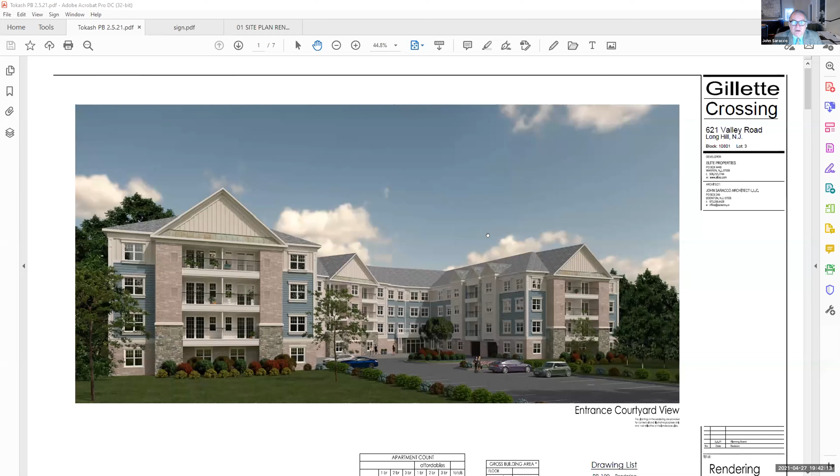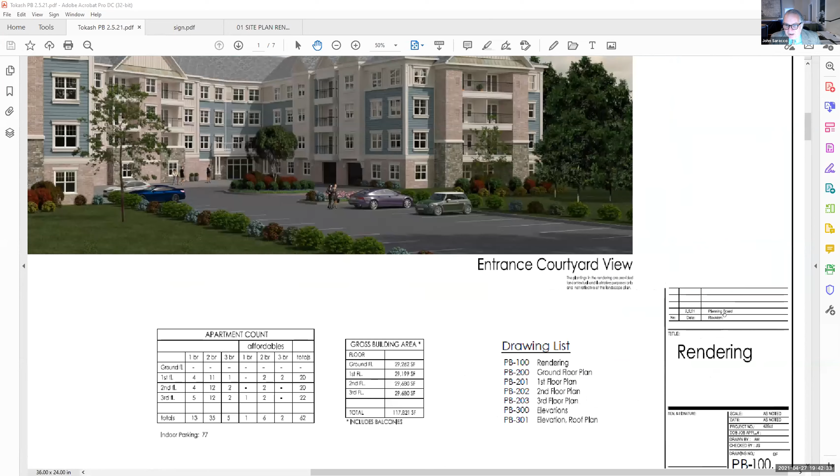Before you get going, John, Ms. Maziarz, I think this would be Exhibit A3. John, why don't you describe the date of this rendering so the board attorney can mark it? Sure. These are the drawings that were submitted on February 5th, 2021, and this particular drawing is PB 100. I'm sorry, Mr. Saracco, Mr. Orth, I believe it's already marked as Exhibit A2, Architectural Drawing 020521. Okay, very good. A3 is the Long Hill Settlement Agreement. Oh, very good. All right, so we'll refer to this back as A2 then for purposes of the record. Thank you, Mr. Bunch. Okay, John, go ahead.

Yeah, sure. So this is a view of the building as you would be driving down the entrance driveway off of Valley Road, and we're looking into the courtyard here, the center courtyard. Just if you don't mind, if I just refer back to the site plan, this is Dynamic's site plan that was presented last month, just to refresh everyone's understanding of the site. We're coming off of Valley Road here. We have some visitor parking off of Valley Road. Dynamic did a wonderful, nice curved driveway, soft curved driveway that leads us right into a very, very nicely landscaped courtyard, a turnaround. And the entrance to our building is right at the end of this courtyard. And the garage entrance is off this turnaround. And I'll show you more detail right on this side of the courtyard.

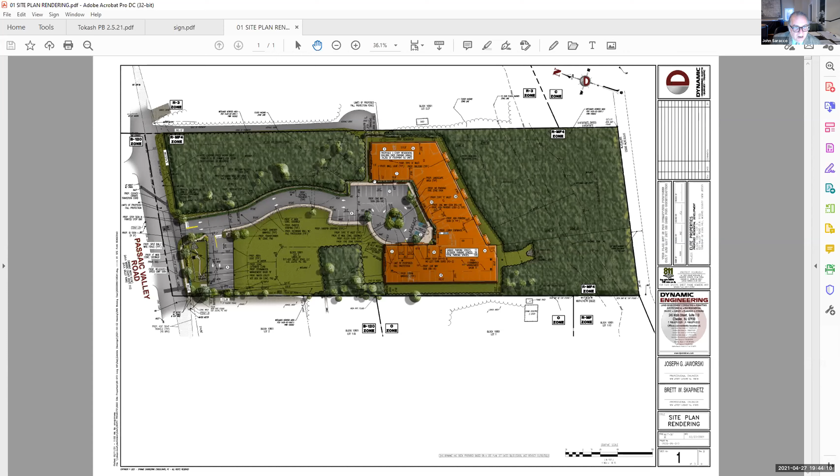So getting back to the rendering, this is the view at the curve of the driveway. We see the garage doors tucked underneath these bay windows here. This is the main entrance to the building at the far end of the courtyard. We framed this courtyard with two nice masonry stone and brick piers with some copper accent and a gable roof. And it's a very lively courtyard. We have nice balconies overlooking the courtyard, very nicely landscaped.

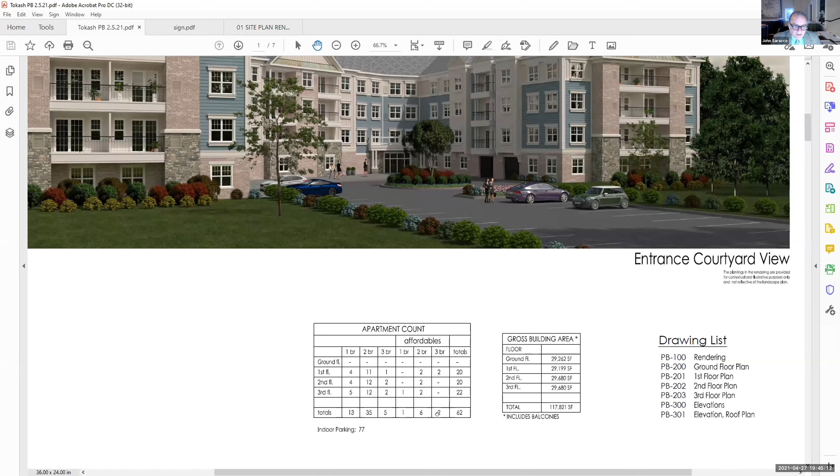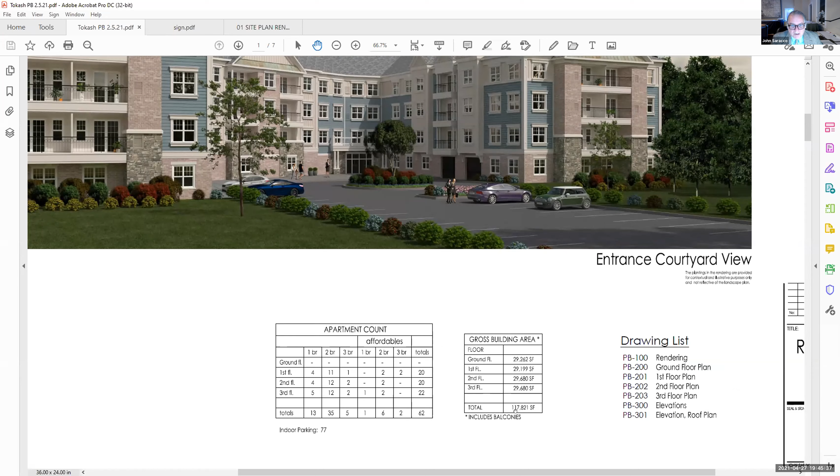Since I'm on this drawing, let me go through the unit counts. We have 53 market rate units: 13 one bedrooms, 35 two bedrooms, 5 three bedrooms. On the affordable end, we have 9 affordables: one bedroom, 6 two bedrooms, and 2 three bedrooms, meeting our affordable obligations. In the parking garage entrance here, we have 77 cars parked. To give you an idea of the size of the building, each floor is approximately 29,600 square feet, total building area of 117,800 square feet.

This is switching to PB, drawing PB 200. This is a plan of the ground floor, which is basically all indoor parking. We have our 2-story lobby at the far end of the courtyard, our trash room, bicycle parking, and our mechanical rooms.

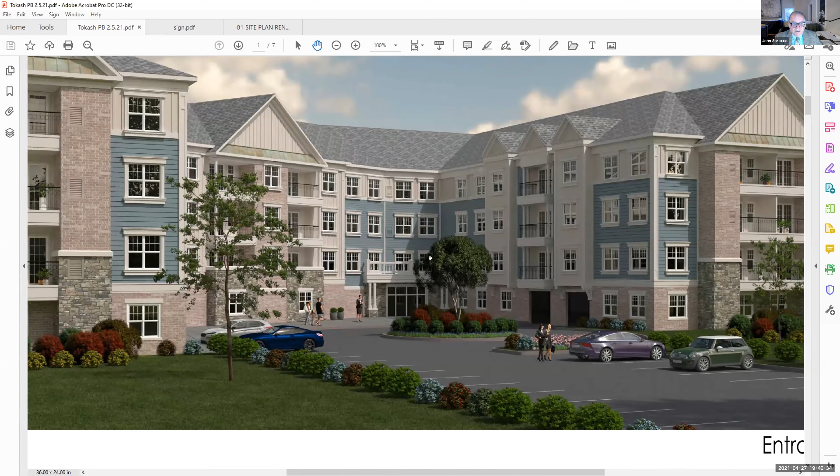Hold on a second - you said 2-story lobby. Is that 2 stories at the ground floor? It's a lobby, so these two windows are like clerestory windows. The lobby is 2 stories inside the building. And this is a portico that's basically covering the entrance, the exterior entrance to the lobby. The lobby is all 2-story interior.

There was some question about how the bicycles will get into the bicycle area. Over here we have a little side door. This circular courtyard is right here - I didn't show that on our plan, but this is the circular driveway. There's a little entrance door right off of that courtyard. Bicycles would come in this way and into the bicycle room.

Our trash room has trash chutes - I'll show you in a few minutes - from all the residential floors that people will shoot trash down to. Twice a week the trash will be handled; we'll have compactors in this room, and twice a week building maintenance will wheel the trash out the overhead doors to a waiting garbage truck, or they could wheel it out this door here. We also have 2 egress stairs to serve the egress requirements for the apartments upstairs.

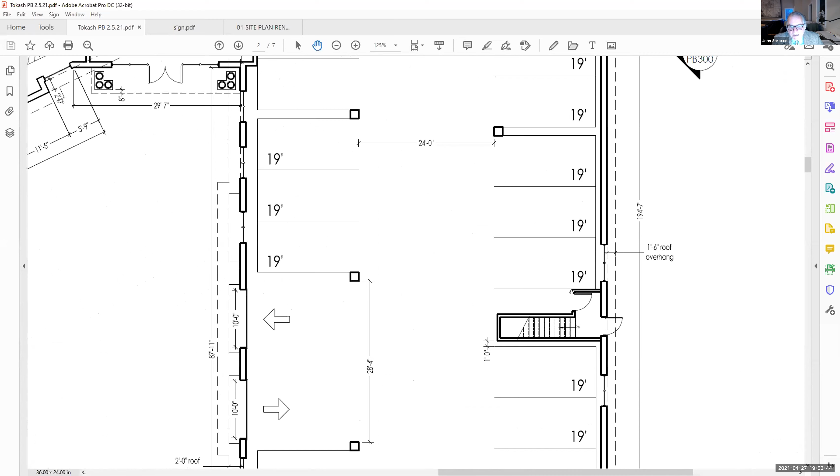I'm sorry Mr. Chair, did you say there were 3 exits or 4 exits? Three, I'm sorry. This exit here is the stairs from upstairs that exit to the side yard, but there's no door from the parking garage through here, so it's totally enclosed. Whereas this one, because I needed an exit at this end of the parking garage, we allowed for a door to exit through here at the ground floor.

And then of course we have the 2 overhead doors for the cars. We like 2 separate doors—they have a more residential feel. 10-foot doors are much more manageable, they don't break as often, and also every time you open a door you don't lose all the heat. This is a heated garage. In the winter, it's going to be fully sprinkled with an NFPA 13 sprinkler system.

If you would like, I can proceed upstairs. This is what I'm calling the first floor plan, but for argument's sake it's really the second floor. We like to just call the parking level the ground floor plan, but really it's a 1, 2, 3, 4-story building—we call it ground, 1, 2, 3. It just helps us differentiate the parking level from the residential floors.

So this is the first residential floor. When we look at the lobby, this is the area that's open to below—this 2-story lobby with the stair coming down into a lounge area. This would be an open railing, so it's just a very comfortable lounge area. And then off of this, the elevator opens up into a nice elevator lobby on the first floor.

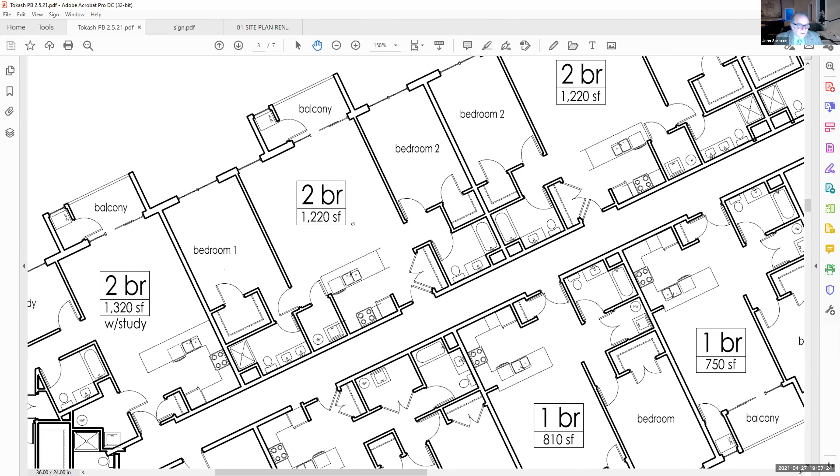We also have a line of 3-bedroom units, with 2 baths. We have a large corner master bedroom with a 4-fixture bathroom and a shower, a very modest third bedroom off of a hallway bathroom, and a larger second bedroom. All the units will have their own stackable washer dryer, and they will all have their own hot water heating, electric hot water heat.

We'll provide a gas kitchen. Each unit has what are called Magic Pack HVAC units. These are excellent units, vertical heating and air conditioning units that have a louver to the outside for fresh air and combustion exhaust, and they have a little door for service.

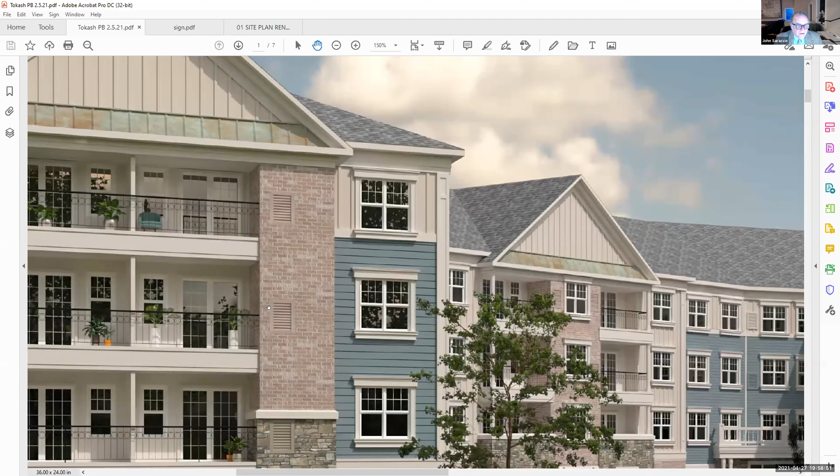Going back to the rendering a minute, you'll see these little louvers working with the HVAC unit immediately behind. We paint them the same color as whatever material they're against, so we think they become very quiet in the facade. You can see them here.

Going back to the typical floor, towards the end of the corridor here we have a trash room with two trash chutes, one for recyclables and one for general garbage, that goes down into that trash room on the ground floor.

In the little nooks and crannies, the dead areas in the knuckles of the building, we offer tenants additional tenant storage if they want.

Before you leave, can you go to the left-hand side of that drawing near the B? Yes, blow that up. This 2-bedroom unit? Yeah, that's fine. How do I get out on the balcony?

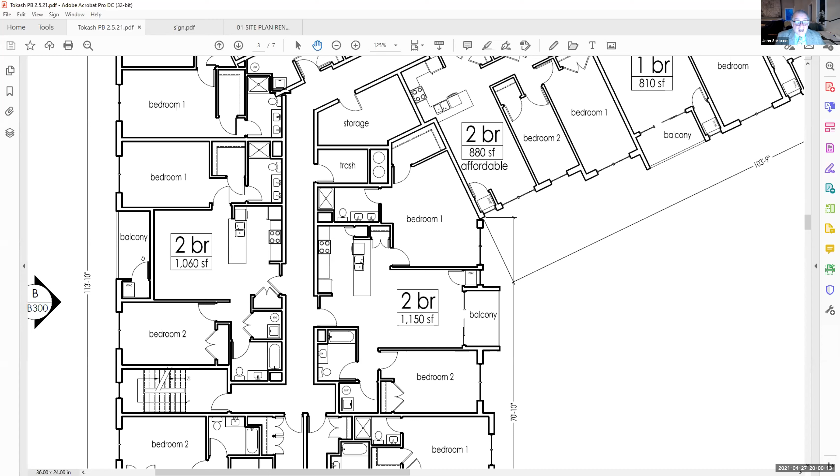So you're gonna have to pay extra for a patio door. You caught me red-handed. Good eyes, very good, thank you for that. Well, I'll speak to management about that.

I do note that the balconies on that side of the building are inset from the outside wall, whereas the other balconies extend beyond the outside wall. Is that a setback issue or a design alternative?

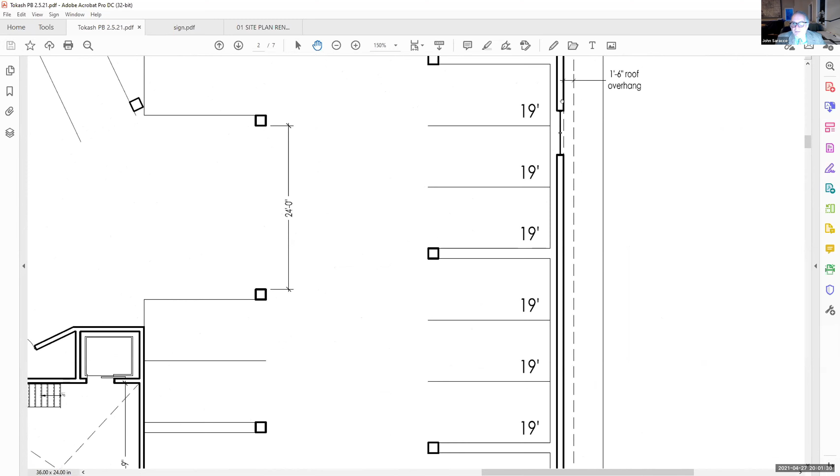Yeah, that's a very good point. One of the main reasons we had a resubmission on our drawings is because we had our side walls right on the required 20-foot side yard setback. One of the reviewers made a good comment that when you take into consideration the 18-inch roof overhang, the eave on the roof, we actually protruded into the side yard setback. So the major redesign in the resubmission was to push our two side walls, and this wall, in 18 inches so the roof overhang respects the 20-foot side yard.

So going back to your question, that's why these balconies don't go past the exterior wall, whereas the balconies in the back and along the courtyard have the luxury to extend past the line of the exterior wall, giving us a bigger living room.

So the 2-bedroom units on the east and west side are actually smaller by 160 square feet than the other 2-bedroom units because the balcony intrudes into the interior space?

Partially. There are funny geometries going on that are hard to picture. For instance, this 2-bedroom's size is really limited due to the location of the stair, and the stair location is basically dictated by the parking spaces down below. So there's a bunch of interrelationships that determine unit sizes. But I can pretty much assure you this unit will most likely rent out quicker than one of the units in the back—corner units are very desirable in the rental market.

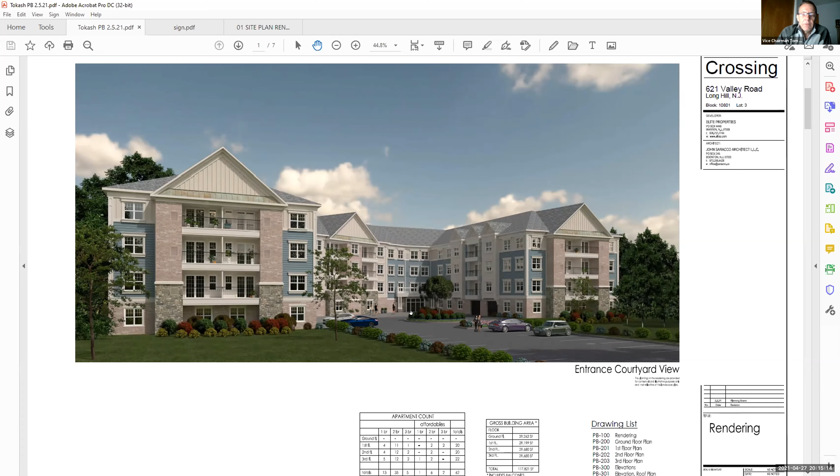You can say whatever you like, Mr. Orth, but that is a four-story building. Thank you. Are you going to talk to the height of the overall building, Mr. Saracco? Sure, give me one second.

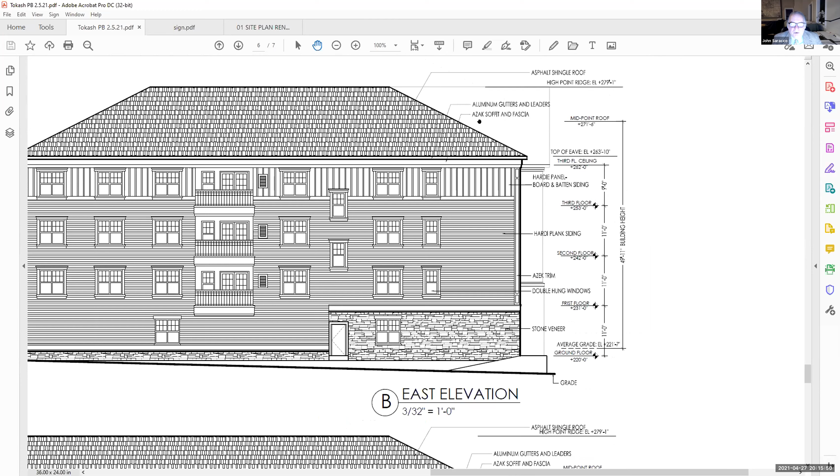So Dynamic established the average grade. I'm not sure if he spoke about that, but the civil engineer calculates the average grade for me, and he established it based on his grading plan at 221 feet 7 inches. We take our building height to the midpoint of the roof, which puts us right under the 50 foot limit — we're at 49 feet 11.

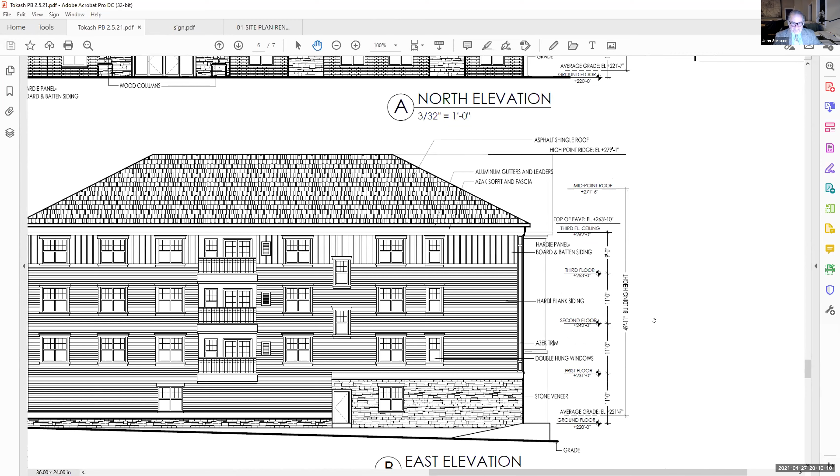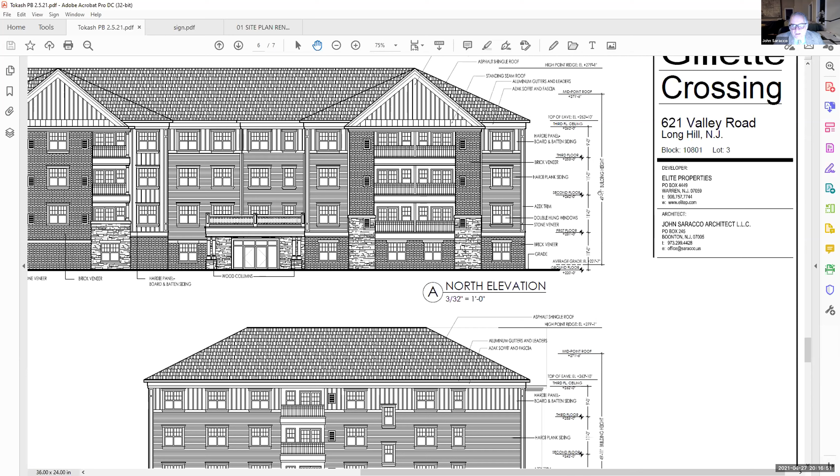And the high point of the roof is above the 50 point, but measuring to the midpoint, we're at 49.11. Okay, and this isn't against ordinance RMF 40, residential multifamily 40. Is that the ordinance for this property? I'm going to defer to Derek on that. It's the RMF 4 zone. That's correct. And you're aware that it is a 45-foot maximum building height? No, I'm a little bit at a loss here because I thought we were at the required building height of 50 feet. I don't have the civil zoning chart in front of me.

Mr. Orth? Just checking my notes, let me interject here. There's ordinance 460-20 that was adopted in July 2020, and that permitted a height up to 50 feet. Okay, thank you, what was that ordinance? It is ordinance number 460-20. Okay, thank you very much. Mr. Chair, those are all my questions.

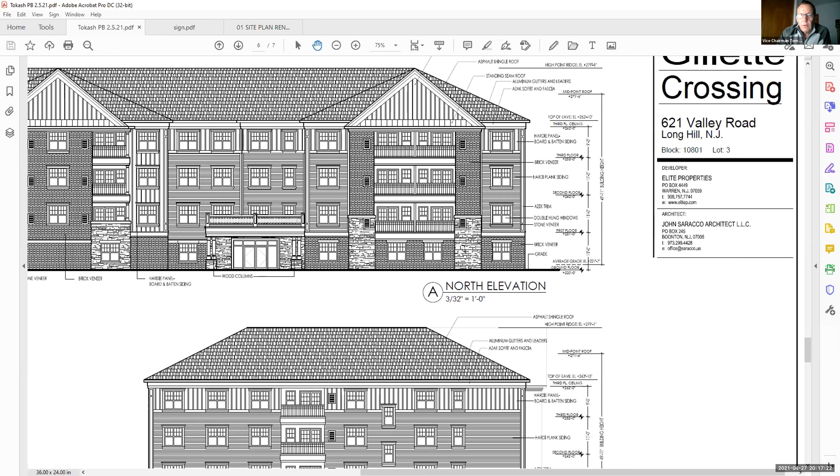Thank you. Okay, put your hand down. Mr. Malinowski, did you have your hand up during the questioning? No, I was just holding up a 5 to say the wall was going to be about 5 feet, that's all.

Okay, Rich, your turn. So my question relates back to a comment in our February 17th letter. I don't know if you had a chance to look at that letter. Yes, I did. And the question is relative to garbage pickup, and maybe you'll need your engineer as well to answer part of this, but it's really relating to the volume of garbage produced weekly, and how long the pickup will take relative to ingress and egress of residents in their parking stalls. I don't know if you can answer that.

Sure. First of all, this will be a private garbage contract, so the amount of pickups can be determined by management. If they feel the need for 3 pickups a week, they will certainly do so. Regarding what happens to people trying to get in and out, I should reiterate that this turnaround is 24 feet wide, so that will allow a garbage truck or even a moving van to park here, and cars can still pass and get around the truck. The garbage truck will probably stop here, and cars can get around with the 24-foot width. If that answers your question, I'm not sure.

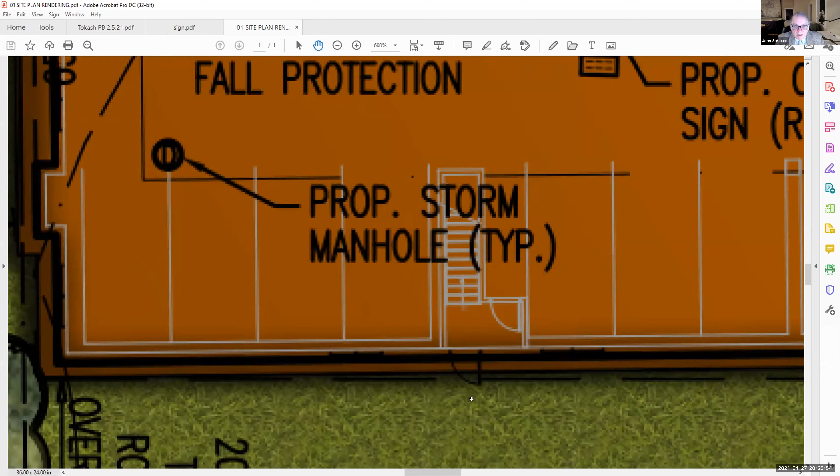The other question I had, somewhat related, is about the entrances or exits, egress, access points on the east and west facades. When you look at the site plan, the color rendering, it doesn't appear clear, for example when you leave the door, is that just grass outside? No, there should be a concrete pad here. And then when you walk further, you're running into landscaping, so there's no clear path from this exit or access point to the main area.

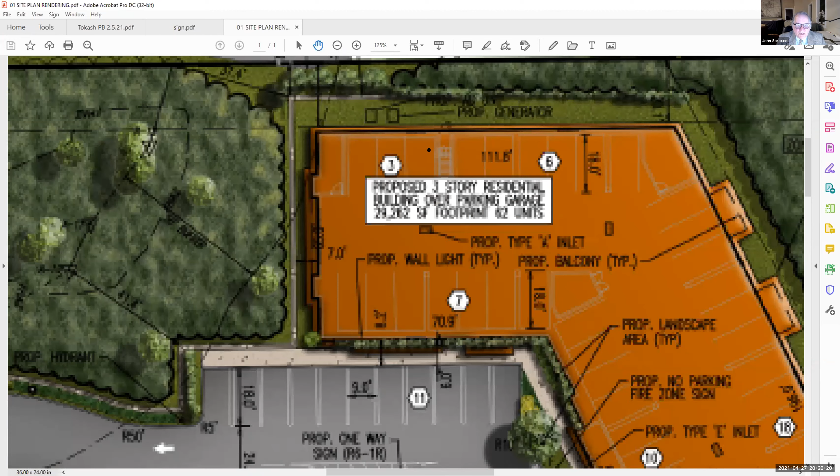Correct, so that's something we will address with Dynamic. I think it's a very manageable situation, but I'll leave it up to him to address it. He does recognize the doors, but he should be showing a pad here and making sure there's a clear walkway, for instance with the generator and things like that. That was my second question, that the generator and the AC unit are in the pathway of the egress.

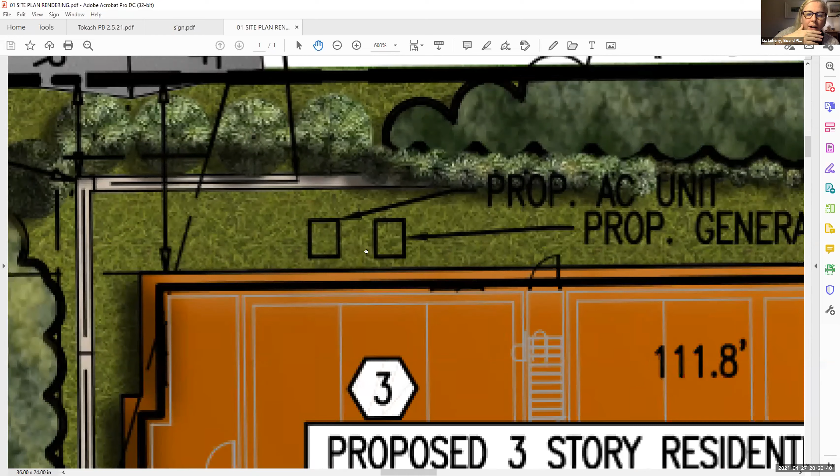The other thing, perhaps a question for Dynamic, is how are the generator and the HVAC going to be screened? Sure, first I should point out that they could be landscaped, but we have to coordinate the egress from this interior stair, a path to get to the emergency vehicles. So that has to work, but we do have room and typically landscape around these. If you don't mind, I should point out what these AC units are for.

Each apartment has their own HVAC unit, their own meters, they pay their own, and have complete control over heating and cooling — one unit can have air conditioning on while another has heat. This outdoor AC unit is for the common areas. And this generator is a voluntary generator, not code required. Elite likes to put in a 20 kilowatt generator basically to provide hallway lighting.

We like to put outlets in the hallway so that if a tenant, if we, God forbid, have a terrible storm and power's out for a week or two, tenants can at least make their way through the building. They won't be able to use the elevator, but they'll be able to see their way through, and the outlets in the corridor will give them charging stations for their phones.

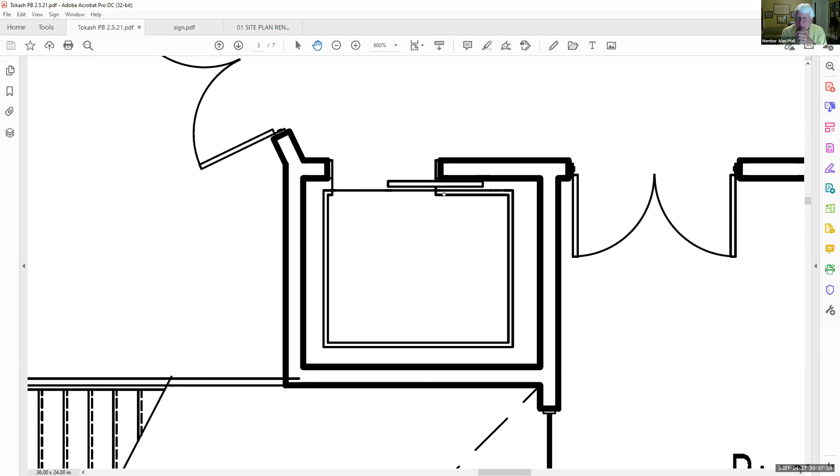It looks a little tight, but okay, so what we do is we will specify a 9-foot high cab, meaning the ceiling height is 9.5, so they could stand a lot of furniture up. I would also point out that 3,500 pounds is actually a pretty big elevator. Typically before the ADA, before the stretcher requirements kicked in, a building like this we would see a 2,500-pound elevator. So these are comfortable elevators.

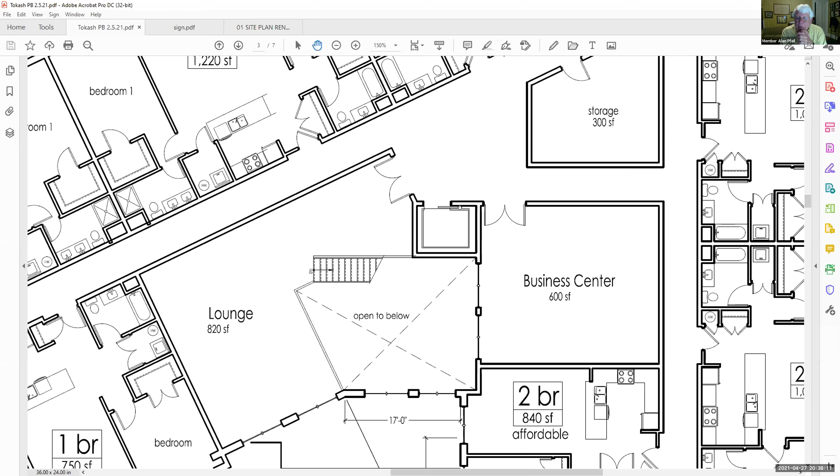Any other board members with questions? In that case, Mr. Prelgiver, are you still with us? Do you have any questions for the architect? Yes, I do. Unless I'm missing something, Mr. Saracco, there's no exit from the rear of the building, is there? No.

So just looking at a typical floor, as I mentioned before, we have this corridor wrapping around, with stairs at the end of each corridor. The building code requires a maximum travel distance, meaning when you take this unit in the middle, there's a maximum distance they're allowed to travel by code, and we meet those requirements. So we had no reason to add another stair in the back. If we took this stair and put it in the back, this would be what we call a dead end corridor, which isn't permitted, meaning...

I'm sorry, I either froze up or you froze up. I didn't hear the latter part of your answer. So if we took this stair here and put it over here, this would be considered a dead end corridor, which isn't permitted by code, meaning if there's a fire right here, this unit would have to walk past the fire to get outside. So we meet the code by providing the 2 stairs at the furthest ends of the corridor.

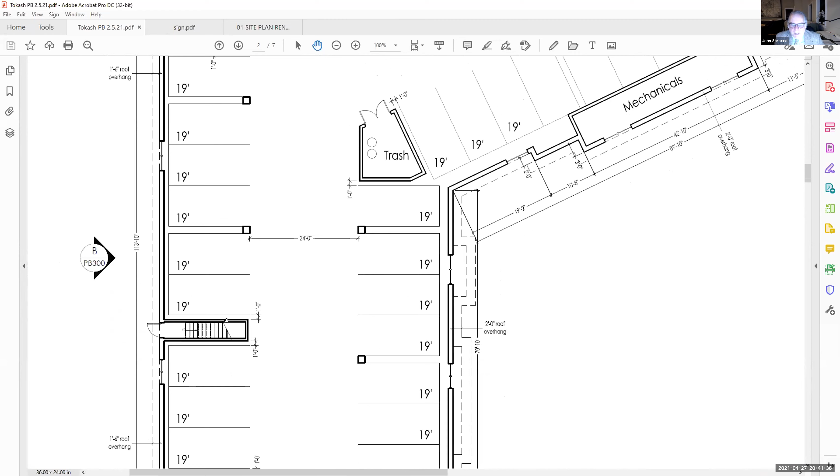Right. So I think maybe the drawings aren't clear, but this stair coming from the upper floors is enclosed in a 2-hour fire rated partition. So this stair is not open to the garage at all. So if there is a fire in the parking garage, this wall will be stable for at least 2 hours. The sprinkler system basically is a method to allow people to safely get out of the building. So between the 2-hour duration of this wall and the fact that the building is fully sprinkled, people will be able to safely get out of this building.

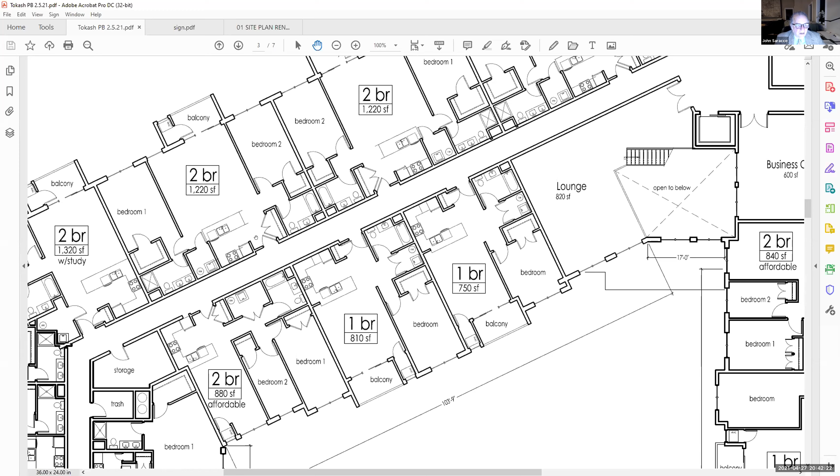Well, are you going to have fire escapes in the back of the building? So this corridor, this is a fire rated corridor. All the apartment doors are all self-closing, meaning you can't leave the door open unless you put a chair in front of it. These are all fire rated doors. So this entire corridor is a rated corridor that allows people to safely either go one way or they could go the other way, depending on where the fire is.

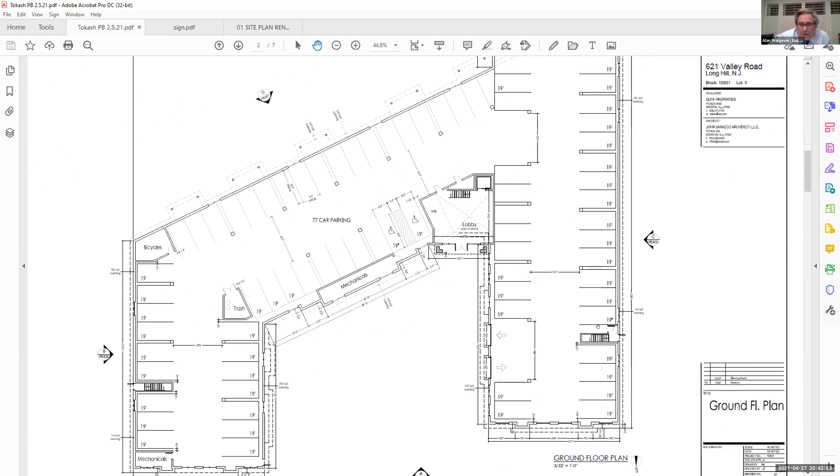Once they enter this 2-hour rated fire stair, then they are within a 2-hour fire enclosure until they get to the side yard, unless the fire is in one of the apartments and the door is opened and the fire spreads to the hallway, which is also equally plausible, is it not?

It's possible, but you have to realize— Objection. John, this is another hypothetical after hypothetical after hypothetical. No, it's really not. It's life. And if I were living in this building, these are very rational questions to ask. They're fire safety issues, and I'm asking them.

And I think it's thoroughly warranted. Are there going to be fire escapes in the back of this building, or some means of egress other than these halls? I think that's a yes or no answer. No. No. And why not? Why wouldn't you have a fire escape?

I'd like to stop you there because you're once again trespassing on hypotheticals. He gave you an answer to the question, and that is no. He has testified that it meets all the fire safety codes. I think this is a line of questioning that isn't going to go very far. Well, I think it's a very legitimate line of questioning, respectfully, Mr. Chairman. And I think cutting it off is a mistake.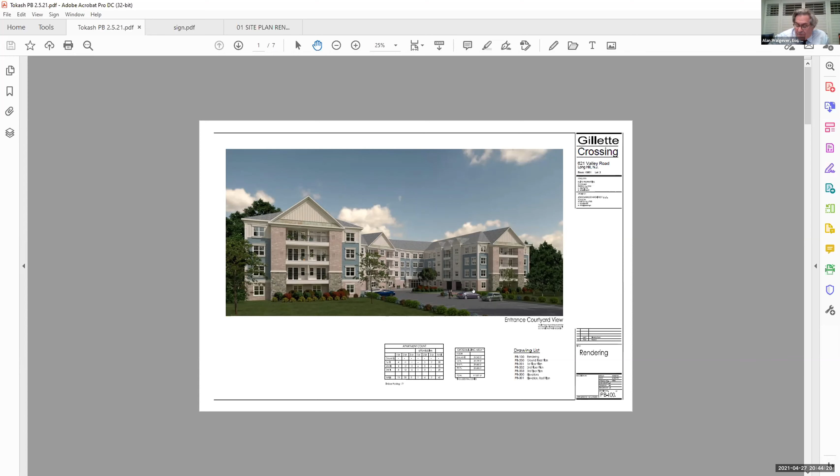I think that is a comment rather than a question on the testimony, and comments are reserved for the end of the hearing. Well, it's not a comment, it's a question. You have to let me—look, you have to be fair enough to let me finish my questions. And you're stopping me, and that's really not fair.

I would like you to ask questions about the testimony that the architect has given. I've got to ask questions even in the absence of what his testimony dealt with, because I think they're critical. Let me ask you this: what portion of this building is sprinkled, and where is it sprinkled and where is it not?

All the apartments are sprinkled. The corridor is sprinkled.

The parking garage is sprinkled. All the spaces are sprinkled. And what is the roof, if you will, of the parking garage made of? Is it made of fire safety material?

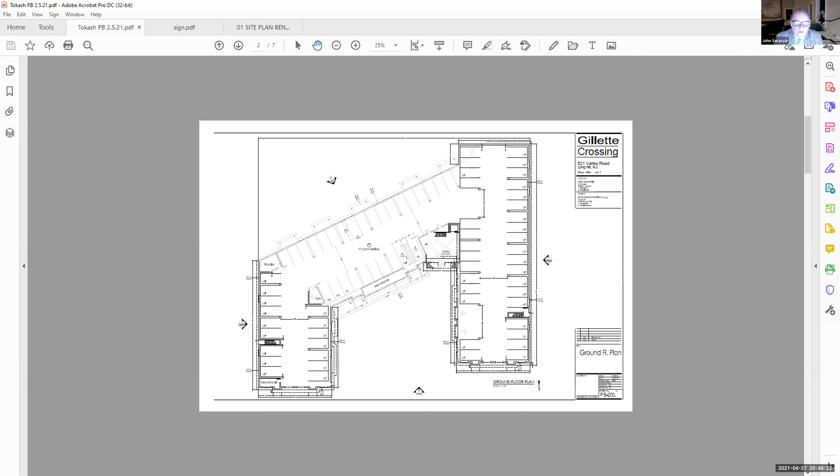Yes. Okay, and where are the garbage chutes located? Is there housing for the garbage chutes, or are they in the halls themselves? So this is our apartment corridor. At this end of the corridor, we have a trash room. So then we have 2 trash chutes.

These are steel 24-inch diameter trash chutes. They have a sprinkler, and then at each floor there's a little pull down door, roughly 18-inch, 12-inch by 24-inch, for the recyclables. And at each opening to the trash chute, there's a sprinkler head.

This enclosure that the trash chutes are located in is a 2-hour enclosure. Years ago, back in the Bronx when I was growing up, they used to have the trash chutes open to the corridor. We don't do that anymore. We have a trash room before you get to the trash chute.

And approximately how big is the trash room? Yes, and the chutes. So these are 24-inch diameter chutes, which are standard in the industry for trash chutes. So this is about 6 feet, maybe 5'6" to 6 feet wide. This is about 30 inches wide, and this is about 8 feet by 5'6" to 6 feet.

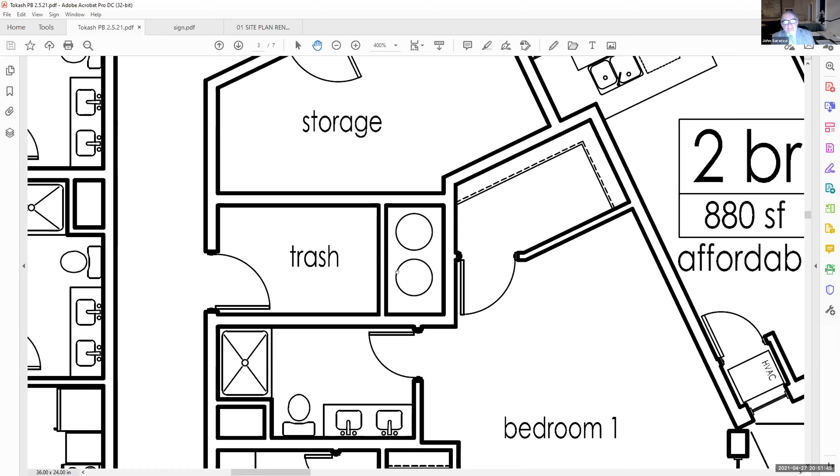Okay, and can I ask you, you described the roof, and I guess it's the roof is how many feet above the highest set of apartments?

From the rendering, the roof extends well above the 4th floor. This is approximately a 15-foot rise from the eave, or the ceiling of the top floor apartment, to the ridge of the roof. We're going from 263 to 279, so that's about 15, 16 feet.

So how high is each floor, from floor to ceiling? We have 9-foot ceiling heights and show 11-foot floor to floor, which allows 2 feet for floor construction and gives us a 9-foot finished ceiling. By the time we put the wood flooring down, the actual finished ceiling is probably like 8 feet 10 inches.

So why is the roof so much taller than each of the floors? And are there sprinklers inside the roof?

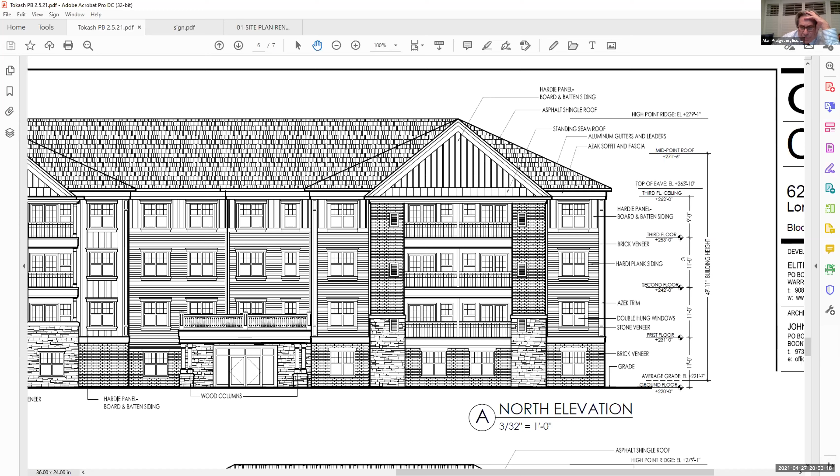We gave this building a nicely pitched roof. It's an aesthetically driven decision on our part regarding why it's a pitched roof — we just feel it fits better for the design of the building. There are no sprinklers in the attic. This is, for all intents and purposes, an attic, and there are no sprinklers up there.

Is there any way for a resident to enter the attic? I should point out that the building code requires a maximum area of 3,000 square feet in the attic before a firewall is put up, so this attic will be subdivided into many fire areas, each not more than 3,000 square feet. Tenants will not be able to access it — this attic is fabricated with roof trusses, and it's very difficult to walk up there. There are wood cross beams, webs, and trusses going in a million different directions; it looks like a bowl of spaghetti. So the last thing anyone wants to do is go up there, but there will be one hatch with a ladder that will be locked, so tenants cannot go up there.

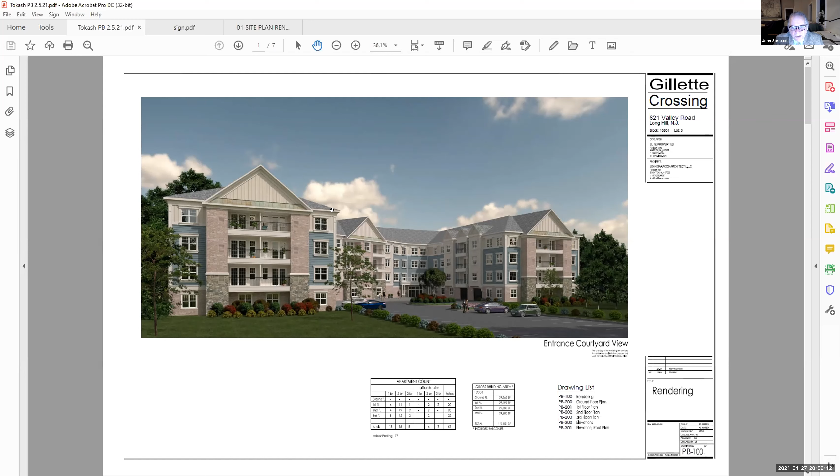Will the building use the attic in any way as storage? Absolutely not. As I said before, the wood trusses and the hodgepodge of wood all over the place makes it virtually impossible to put that attic to any usable use.

Before, I thought I heard you say the roof was going to be over 50 feet from the bottom of the building — something like 53 or 54 feet. Is that correct? It's going to be about 57, 58 feet — that's the ridge of the roof. But this town measures building height to the midpoint of the roof. So the midpoint of the roof, I don't know why that's significant. It's the top of the roof that's significant.

Are you going to seek some kind of variance for the height of this building? Objection — we're not required to seek a variance for the height. Well, he can answer the question. He's the architect, I don't want you to answer. The board's planner has already answered this on page 5 of her report. I have not heard the answer and I'm asking it. I don't want you to answer it — I want the witness to answer it. John, if you know the answer. I defer to Mr. Orr. Please, you don't control this meeting — if the attorney for the applicant wants to answer the question, that is his right. Please stick to questioning, not procedural issues. Well, I think there's a witness here, he's got a witness up, sir. I don't agree with you — a witness is supposed to answer the question, not his lawyer. This architect is a smart, educated man, he understands this building. I ask you to focus on questions, not procedures. Well, I'm asking — I want the architect to answer the question. Can you repeat the question? I haven't heard an answer to the question.

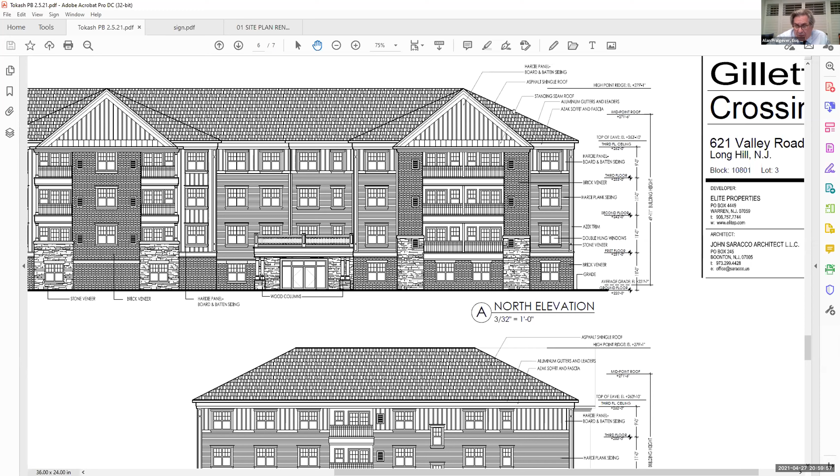We didn't establish a pet walk on the site. That is something I think should be considered. It's an important element in a lot of the projects we do, and we thank you for the comment. As I said before, we're going to work with Dynamic to address outdoor amenity space to the best of our ability, considering the environmental constraints we're dealing with.

And how many? Sorry, Mr. Pellegrini. Sorry, Mr. Chairman, that would be an important issue. I'm sorry, Mr. Saracco. Mr. Chairman, you asked me to advise you when it was 9 p.m. It is now 9 p.m. Mr. Proudgiver, how many more questions do you have? I have a fair number, but... All right, in that case, hold them.

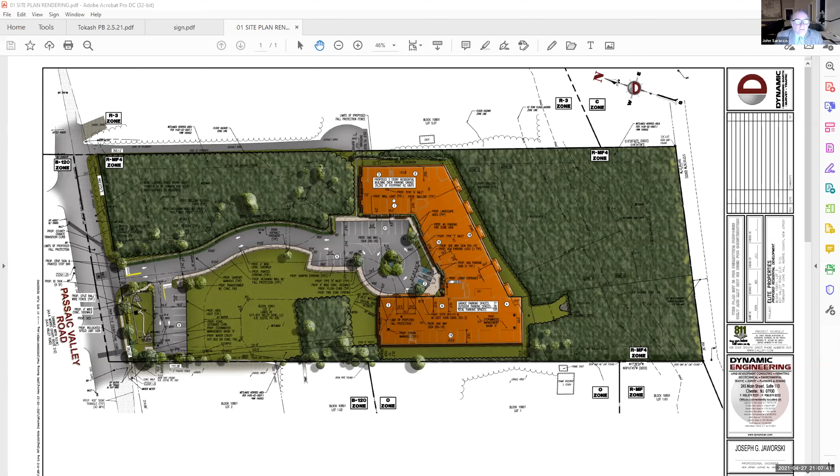Mr. Proudgiver, continue. Mr. Saracco, how close are the generators and how numerous are they to the edge of the property line? Let me just go back to screen share. The building is 21 feet 6 inches off the side of the property line. The generator will be somewhere in between there. We have to work out with Dynamic the questions that Liz brought up regarding egress path. So the generator will be located probably at least 5 feet away from the building, probably about 10 to 15 feet off the property line, but that'll be worked out, and Dynamic will have a more detailed plan regarding that.

And how noisy are those generators? This is a relatively small generator, considered like a large residential generator. We checked the decibel levels on it, and when it's in test mode, which kicks off once a week for maybe 15-20 minutes just to keep it in good shape, that test level decibel is 55 decibels, which isn't very loud. When it's in full mode, meaning when there's a blackout and the generator's working real hard, it's at 65 decibels, which is still a pretty reasonable decibel level.

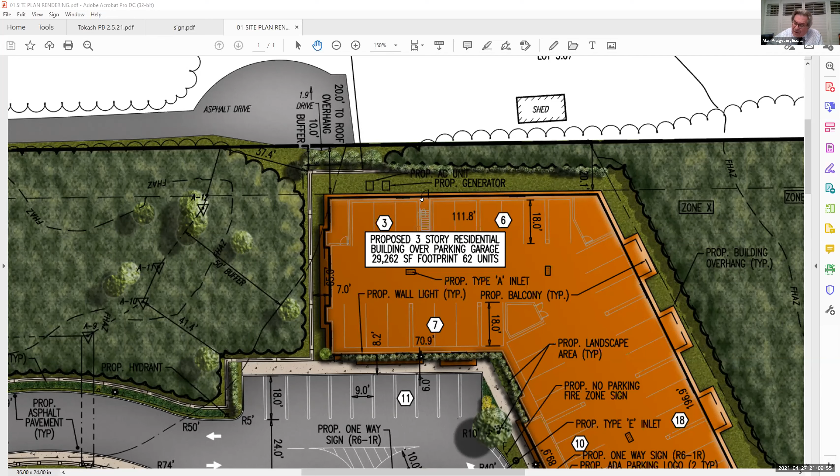And if I can ask you, how many elevators are in this building? One. Just one.

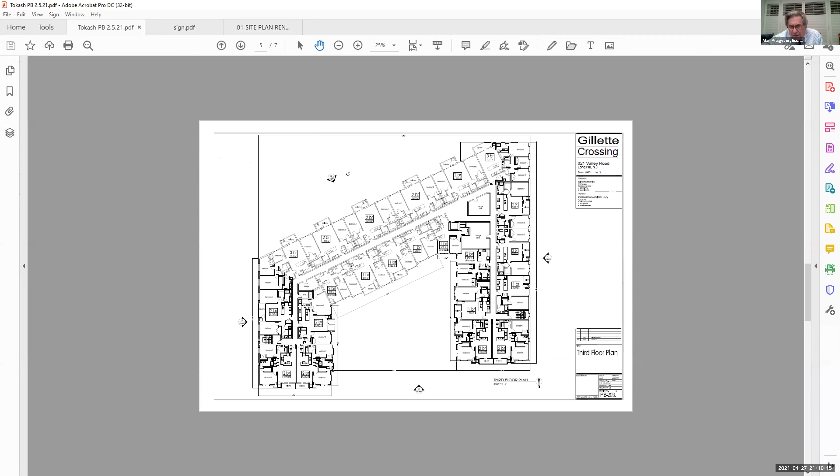So what happens if there's a handicapped person that needs to use the elevator and someone's moving in? Or there's a delivery, or someone else is using that elevator? In the old days, there was something called common courtesy, that the delivery man, if he saw somebody in a wheelchair waiting to get upstairs, would miss a run of the elevator and allow the wheelchair person to use it.

So hopefully that's how things will still proceed. Did you contemplate having more than one elevator for that reason? If there's an emergency, for example if somebody was injured or had a heart attack or stroke and the emergency group had to get up there and you had a filled elevator with furniture, wouldn't it take several minutes to unload the elevator to permit the emergency people to get in to get someone out?

I think if somebody moving furniture was using the elevator and they saw an elevator pull up, I think any normal person would not put a dresser in the elevator at that time. Right, but what if it was already loaded with material and the emergency personnel had to get in and get somebody out? They couldn't do it, could they? They'd have to use the stairwells then to do it.

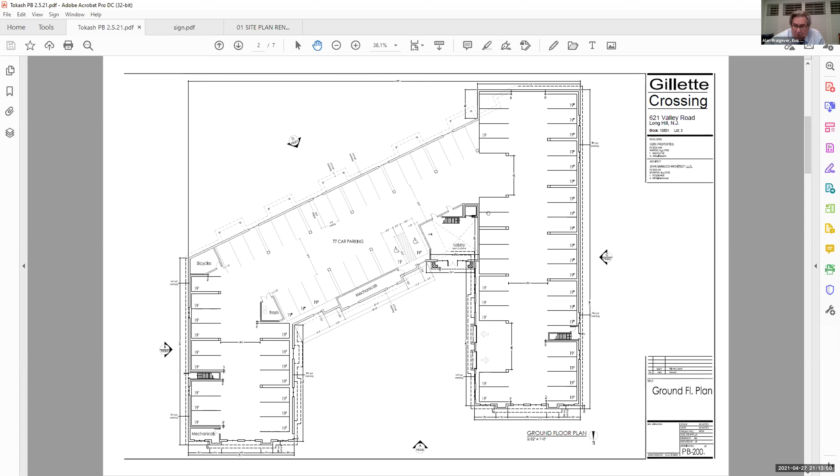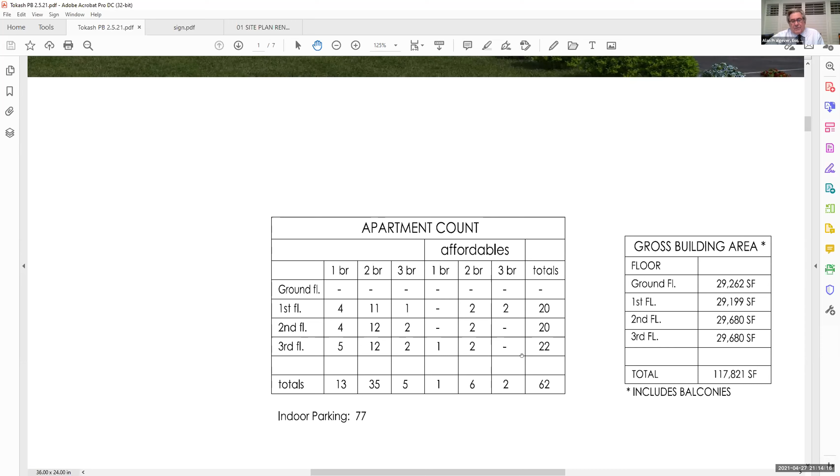Well, how many units per floor are there? For example, on the 4th floor, how many units, and how many 2 bedrooms, 3 bedrooms, 1 bedroom? On the 3rd floor, we have 5 one-bedrooms, 12 two-bedrooms, 2 three-bedrooms, and on the affordables 1 one-bedroom and 2 two-bedrooms. So a total of 22 units. So there are 22 units and 20 units on the other 2 floors.

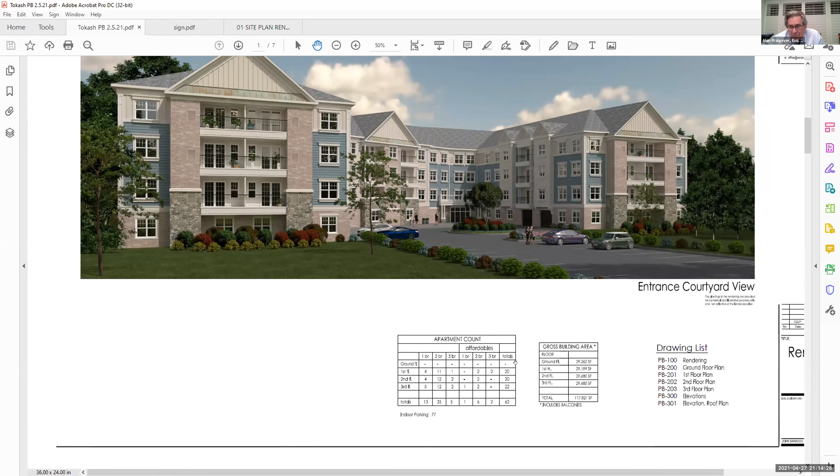So would it be fair to say this building is going to house at least 80 people? It could, yes. And yet there's only one elevator for 80 people, is that correct? We feel very comfortable with that, yes. Okay, all right, let me see.

Fire trucks. You said that the circular driveway in front of the complex would accommodate a moving truck and delivery trucks. But do you know what turning radius a fire truck that could accommodate a 4-story building would need to turn in this environment? I really have to defer to Dynamic to address those type of questions. Dynamic is who? They're the civil engineer. I see. So you haven't discussed the use of a fire truck with Dynamic to date?

No, I didn't say that. I just said that any questions regarding drive access, vehicle access, I would like to have Dynamic address. Well, are they going to testify, Mr. Saracco? Dynamic going to testify? They testified previously, and I believe Mr. Orth stated that they will be coming back to testify again.

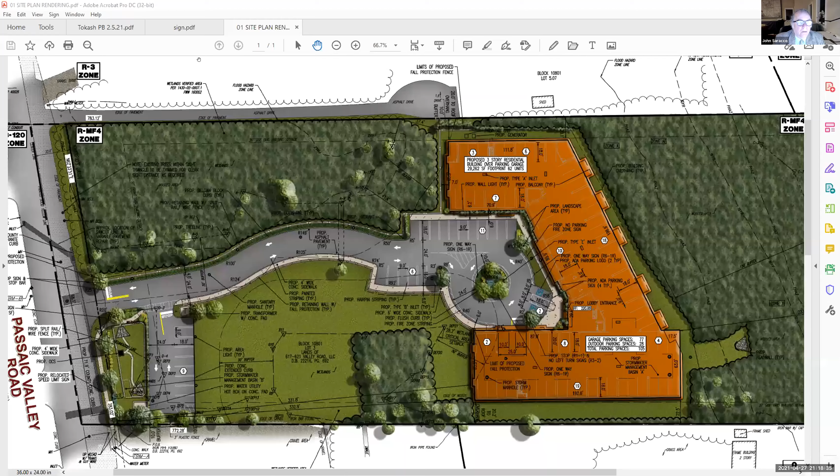Sure, I lost my screen share. Oh, there we go, okay. If you just give me a minute, I'll find the drawing. So this is... that's it. This is PB 300. Right.

So the high point, the highest ridge is at 279 feet 1 inch, and the average grade is 221 feet 7 inches. So that's approximately 56 feet, approximately, from the average grade. I think it's 57.6 actually. Okay, I said approximately, yes. Well, I'm going to tell you what it is.

Okay, all right, so what's the, if we take the ground floor, what's the maximum height at the ridge? That's whatever number you said, it's another 1 foot 7 inches. So that'd make it 59 feet 1 inch. Is that correct? I'm not really doing the math right now, but that sounds pretty close. Yes, I think it's pretty close.

But I realize that ordinance 460-20 goes to the midpoint. But if you take the ground floor, we exceed the 50 feet, is that correct? The building height is measured from the average grade. That wasn't my question.

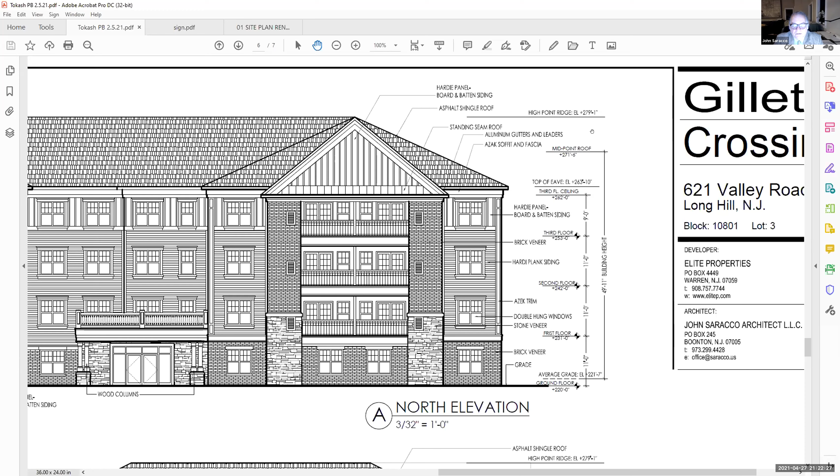But we don't know where they are. No, we know that they are not going to exceed an elevation of 279 feet 1 inch. That we do know. How many are there that you're hiding? So if we go to the roof plan, those ridge vents, I don't know if you could see my cursor. I can all see it, along the ridge of the roof.

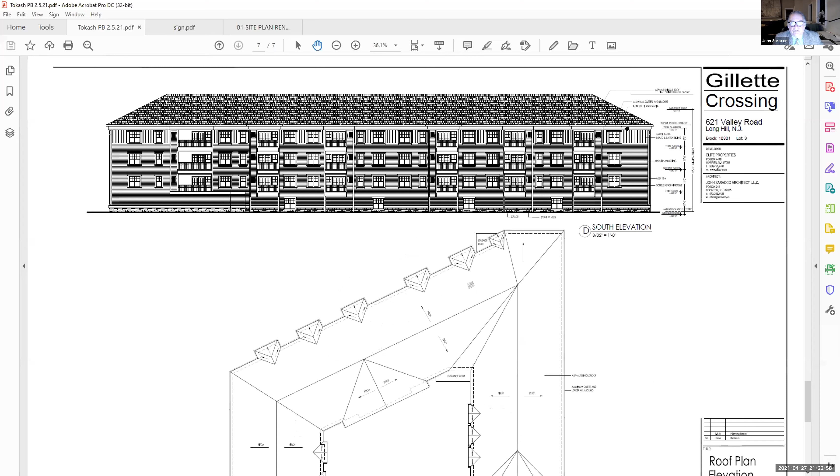So the vents go along the edge of the roof and on the ridge, but there's nothing at the peaks. The highest vent would be at the ridge, but there would also be smaller, lower ridge vents along all the gables. And are there any automated fans there at all?

No automated fans or temperature control. There'll be plumbing vents going through, and the trash chute has to exhaust to the roof. So there are some mechanicals coming through the roof, but no mechanicals in the attic, no automated fans for these vents. It's strictly flow through, non-automated.

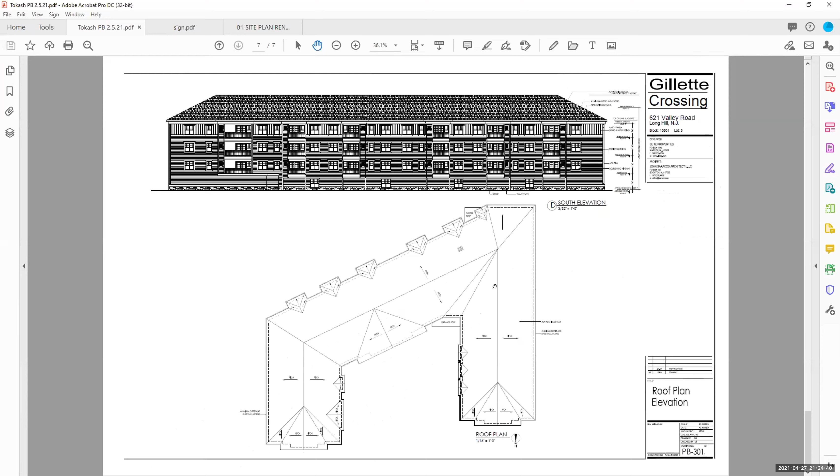You mentioned on this diagram that there's going to be Hardie panels and brick veneer attached. How is the brick attached to the building? It's a true 4-inch brick veneer. Behind that veneer is a wood stud wall, and the brick is secured to the wood with anchors every 16 inches vertically and horizontally.

What about the Hardie boards, how are they attached? It's Hardie panel, Hardie plank, attached with nails or screws fastened through the Hardie plank into the plywood. Do they have any tendency to detach? If a proper installer is selected and all the requirements in the installation literature are followed properly, that Hardie plank will be there for a very long time.

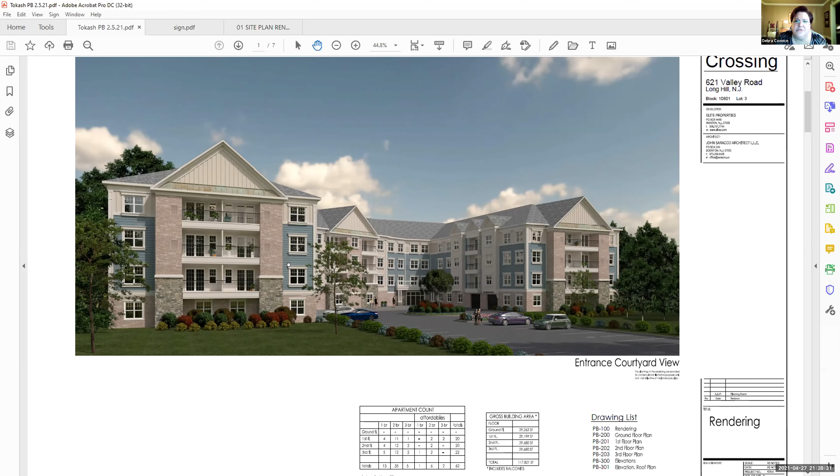Thank you, Mr. Chairman. We would rest our affirmative testimony for this evening. We would respectfully request that this matter be carried without further notice to the board's next hearing. Regarding scheduling, I do expect and hope we will be able to submit revised civil engineering plans, Mr. Chairman, however that is somewhat contingent upon the DEP reaction to our freshwater wetlands application. So as to not waste the board's time, I would request that the application be carried to the board's next meeting date, but in the event we are delayed with our outside agency approvals, I will alert the board 10 days or 2 weeks prior and request that the application be carried on the record if necessary.

Okay, the next date would be May 25th, which gives you 4 weeks. Hope springs eternal, Mr. Chairman. Before you leave us, there was some discussion at the last meeting when the engineer was here about that water company hot box, and there's been some discussion back and forth among the consultants about that.